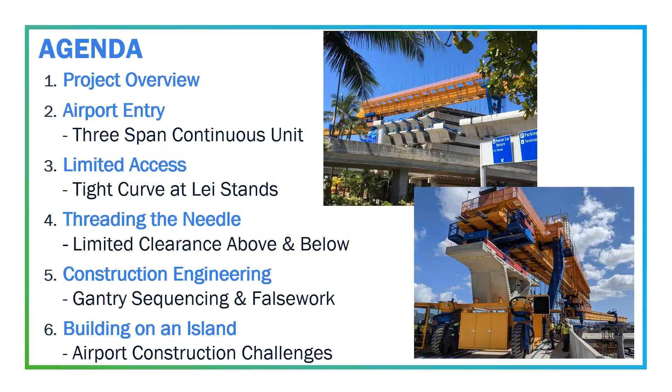The Honolulu AGS project owner is the Honolulu Authority for Rapid Transportation, or HART. They've been a wonderful client to work for, I have only positive things to say about this project and them as an owner. The airport guideway is one phase, phase 3 of the overall project, starting just a little bit before Pearl Harbor station and continuing all the way through Middle Street Station through the airport. It was awarded in 2016 for $875 million.

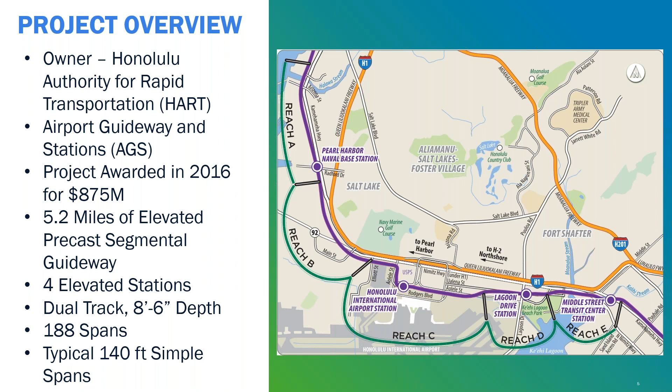It's 5.2 miles of elevated precast segmental guideway, 4 elevated stations which were supported in part by the guideway as well, dual track, 188 spans, typical 140-foot spans with an 8 foot 6 inch depth.

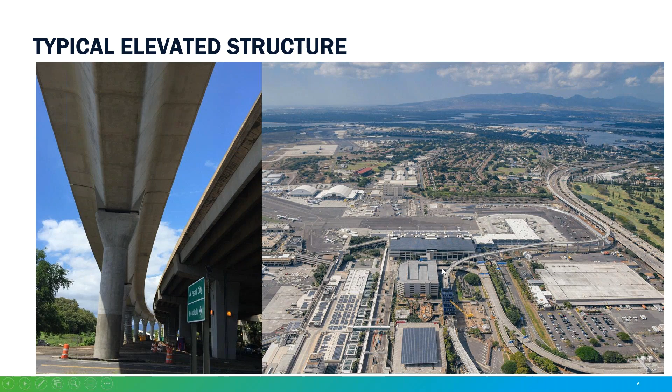This is a look at, on the left, the typical guideway spans, and on the right an overview of the project corridor. Up here on the upper right is Pearl Harbor, going around H1, turning past the tarmac for HIA, then trying to get into a tangent alignment in time for the HIA station, putting some pretty tight curves into this area. Focus of today's presentation is in the HIA area, going over the tarmac and getting past the parking garages. You see all the operations roads, elevated ramps, and this is where the future station will be located.

Well, it is currently located - we have 3 main areas that I mentioned earlier. Airport entry spans 522 to 524, this was a 3-span continuous unit. Then spans 535 to 540, another very tight radius curve with real limited access and limited footprint for piers. And my personal favorite was a limited vertical clearance and shallow box area in what we would call Reach D near the Lagoon Drive station.

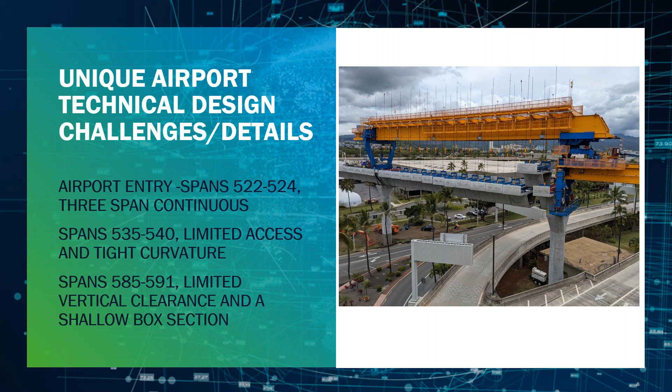Overall, with this 3-span continuous unit, our goals were to use the project-wide span-by-span erection method and the project articulated gantry, to try and minimize impacts on the way we were doing this, and also minimize impacts to the operations of the airport. This is a very active international airport, with a post office nearby that also needs to be operational nearly 24 hours a day. We also wanted to incorporate, even though we were doing an atypical span arrangement, as many of the project details as we could to minimize modifications to the forms and construction techniques.

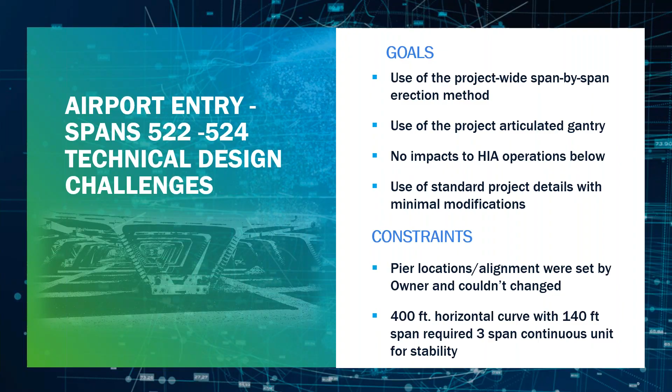The pier locations and alignment were set by the owner and couldn't be changed. In this case, we had a 140-foot span with a 400-foot curve on it. Once again, this is dual track, single box, so a pretty tight radius for an eccentric load. So we ended up throwing in a 3-span continuous unit for the stability of the spans. This area is also the highest portion of the project, so that we could get up over the airport tarmac right here.

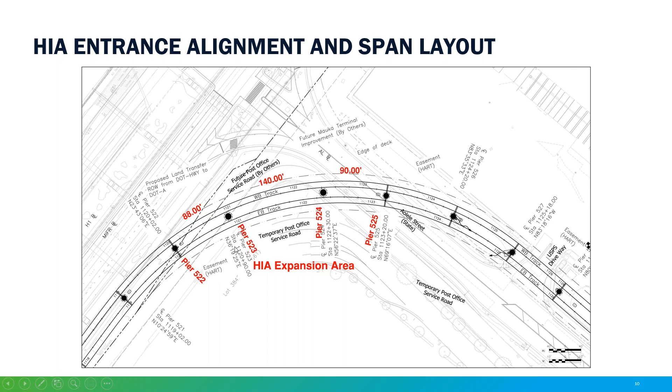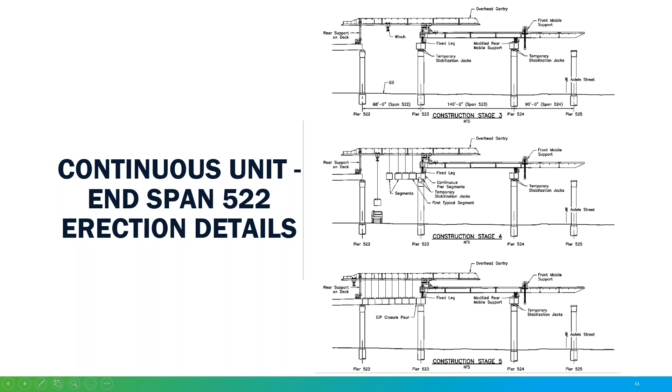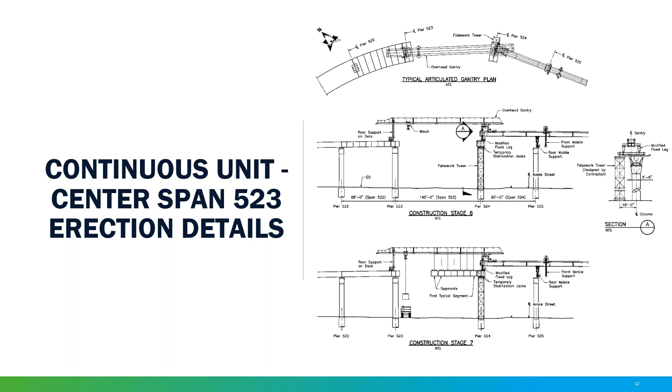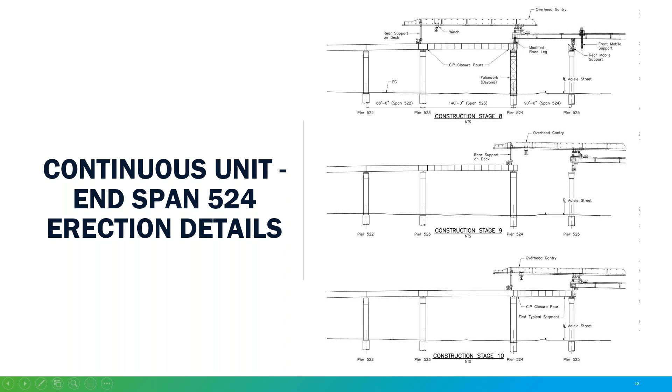The way we did that is we took simple span construction techniques, erecting the first span using span-by-span methods, and then made continuity by overlapping the post-tensioning tendons at these pier segments. Then launching the gantry - and Tony and Jeff will talk about the unique challenges of the construction engineering and gantry in this 140-foot span and tight curve, and what was needed to get this around the corner. Then the end span erection - each time we launch and erect the span, these tendons get overlapped, and we stress from the leading end, one end stressing only.

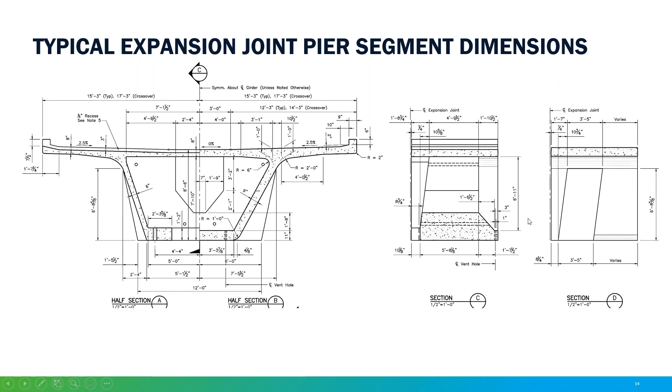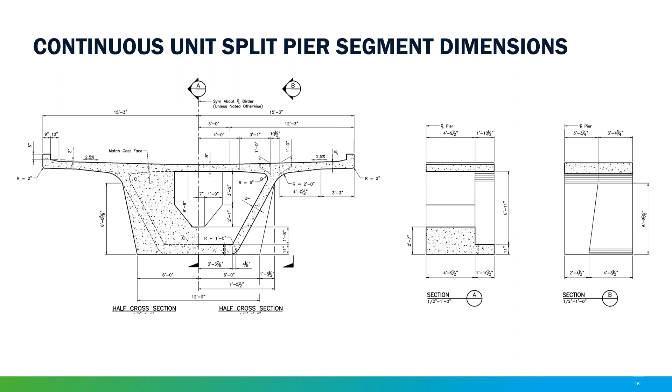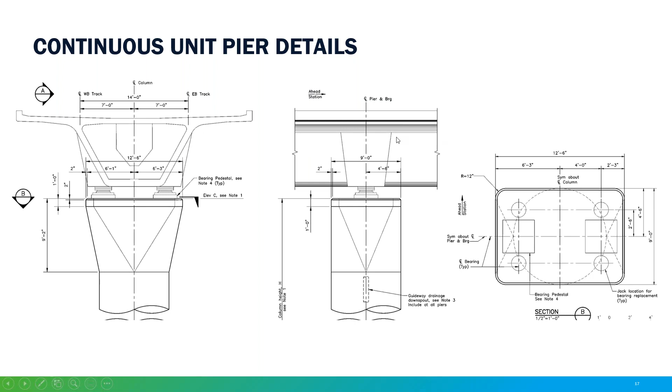This is the span side of the EJ segment. As you can see, we basically just shortened it up, truncated it through the diaphragm, and this allowed us to use a lot of the same elements from the precast yard. Really the only things that needed to be changed were some of the core forms and the bulkhead forms, and a pretty slick detail - put those back to back and match cast them, and all of a sudden you have a nice full pier segment that has anchorages on either side that can be stressed together for these pier segments.

This kind of shows how these anchorages overlap, and you can see it's quite a busy segment with the anchorages on one side with the exits, 4 tendons plus a future tendon. We needed to add some PT bars in the top to help with both ultimate moment and stresses in this now continuous high negative moment region.

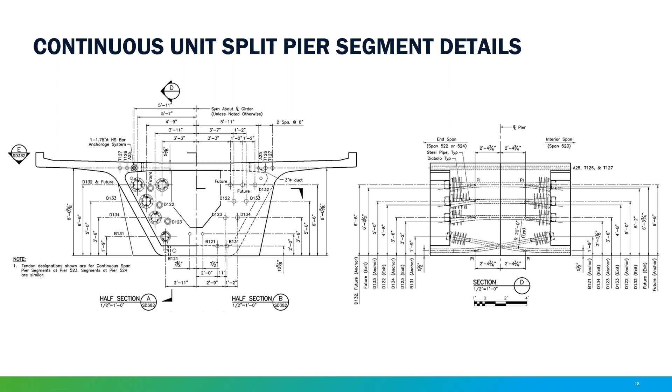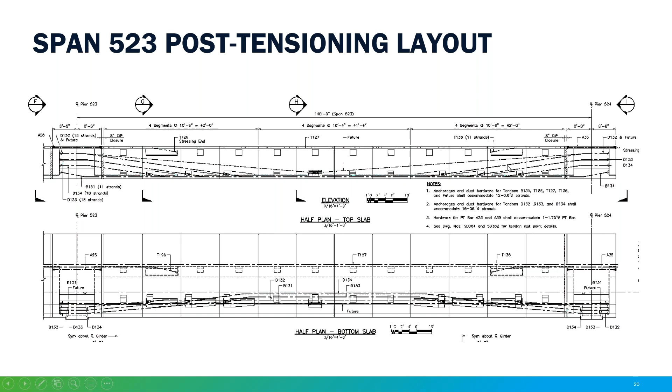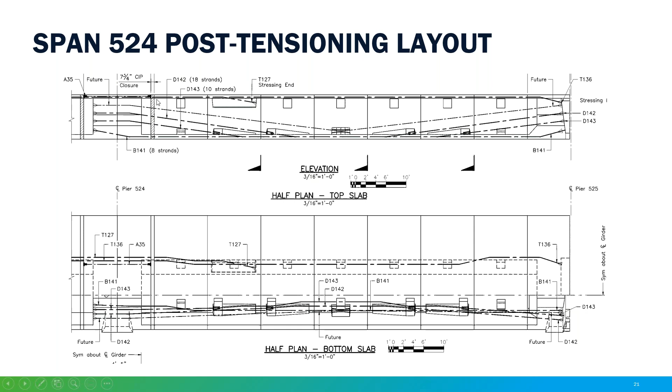So this is the overall PT layout, seeing those pier segments in use. We utilized a lot of the same typical segments within the span and tried to only use a unique segment in these pier segments. This is what that 140-foot span looked like in the center. We had to add some top PT, so we added some isolated top anchor blocks for the negative moments over the continuous piers, but otherwise utilized much of the same details as a typical span. And the end span, same as the first - we did introduce some closure pours here to help with the construction phasing and match casting.

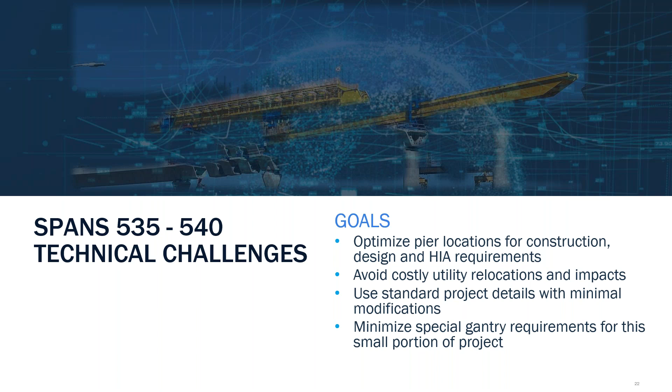Just a few spans up station, we had another tight curve area that I spoke to a little bit earlier. We wanted to optimize the pier locations and design within the HIA, the airport requirements, and avoid costly utility relocations and impacts. We aimed to use the standard project details with minimum modifications, and finally, we had a couple of gantries on the project, but we wanted to avoid any specialized equipment or reconfigurations that were needed. Tony and Jeff will dive into how we were able to accomplish that.

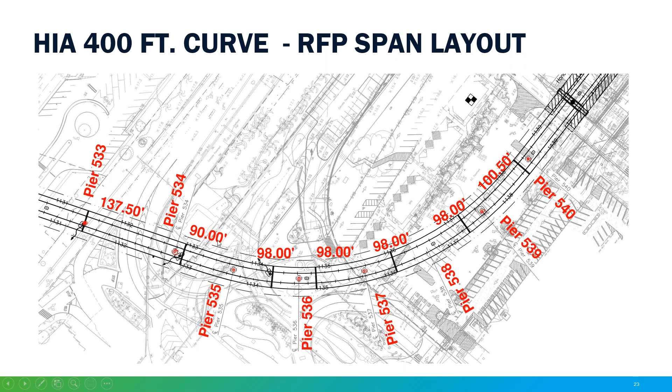The RFP span layout was pretty tight - short spans, tight radius, quite a few piers.

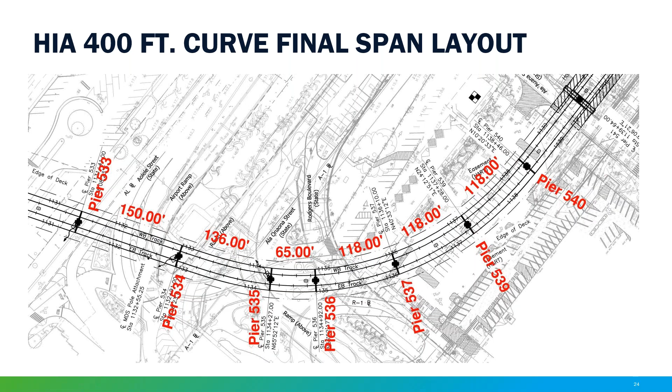We ended up reconfiguring some of these locations, keeping some short spans for stability. You can see all these access roads down below. We had really limited locations to put down towers, as well as these lei stands right here in this parking lot. The 118-foot span ended up with the only pier in the lot itself, and that was a big success to get 2 piers out. Our numbers jumped from 537 to 539, so we were able to optimize that down and eliminate a pier from the RFP plans.

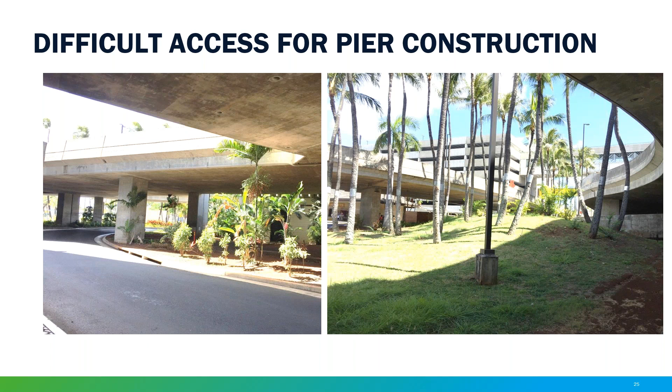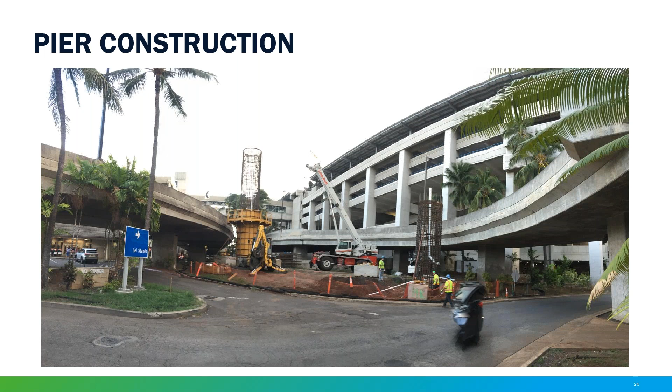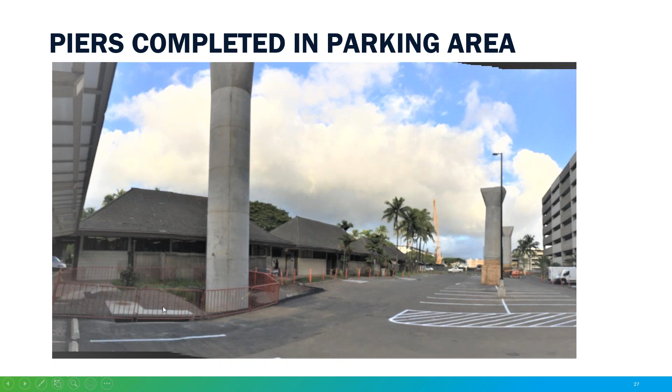This is the work area, a nice congested area confined by ramps and roads, and they ended up getting in there, putting in the piers, real tight access for major construction while maintaining all the daily operations for flights coming in and out. You can see the one pier in the parking lot itself, and we were able to avoid a utility which would have been a major relocation necessary in the parking lot down there.

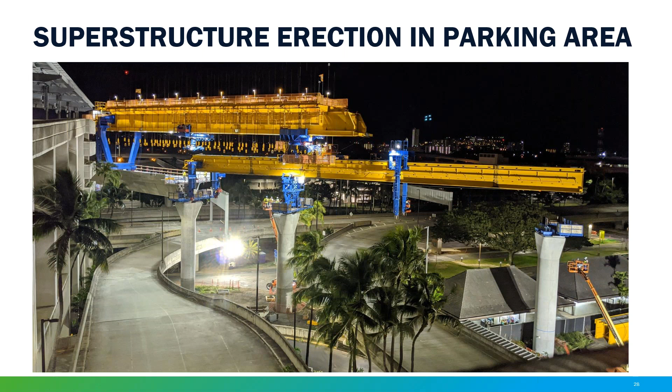Tony and Jeff will talk a good bit about the gantry operations in this area, but one benefit of putting that 65-foot short span in here is, as we were coming around this corner, we needed to make sure the nose of the launching beam and the gantry itself wouldn't clip this airport parking garage. They have some great pictures that show just how close in we got, within a couple feet, to get around that curve.

Post-tensioning of the tight radius curves utilized a lot of the same details as the typical span-by-span, with the addition of this top tendon. Even though it's a simple span, this top tendon is not used for top stresses in the classic sense—it's used for torsional shear stresses, and that's why it needed to be added in. But that was really the only special detail that got added.

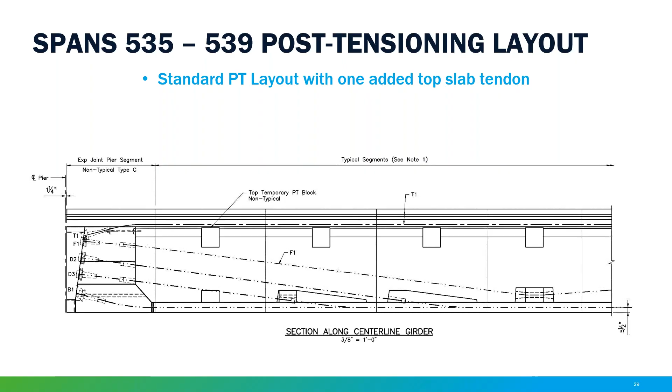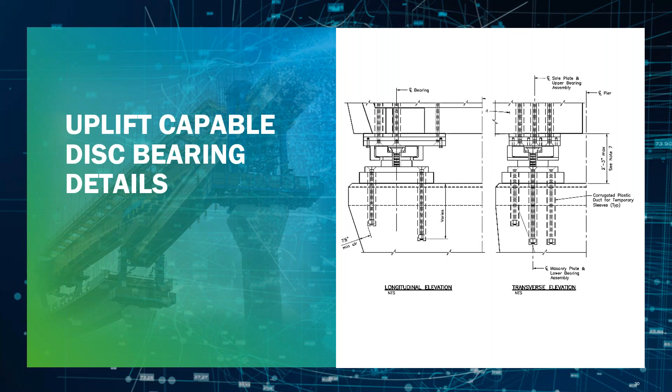But with the simple spans and the tight curves, we did end up having to utilize uplift-capable disc bearings. They were provided by R.J. Watson, and that was one of the unique features of this bridge. These do see uplift in the service condition.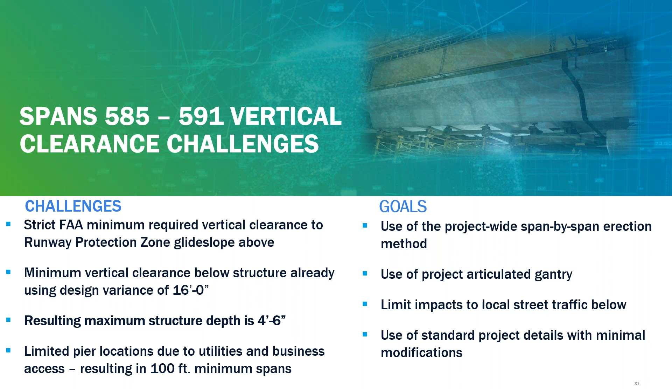The last area I want to touch on is the airport guideway or glideway area of the job. There was an FAA requirement for minimum vertical clearance in the glide slope above the runway, so we had to get planes above these spans with the train clearance, but also it was over an active roadway with trucks and a lot of industrial businesses. We ended up with a resulting maximum structure depth of about 4 feet 6 inches, and once again limited pier locations because of all the businesses and utilities in the way, while still wanting to use a lot of the typical details from the rest of the project and avoid costly modifications.

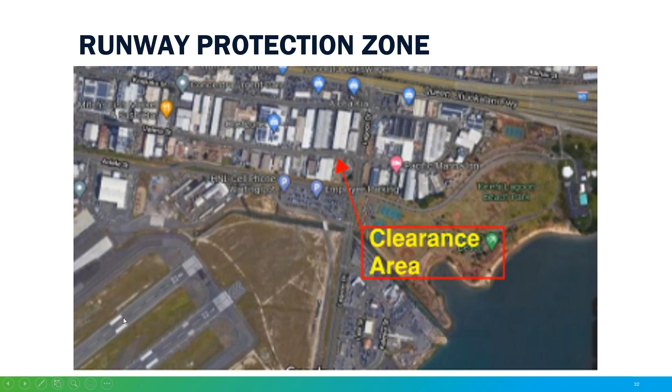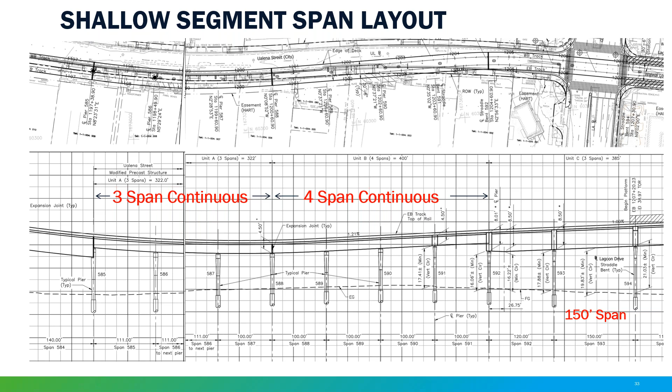This gives a sense of the project area along Ualena Street, which then goes over Lagoon Drive. You can see the glide path here, and that ended up setting our alignment down in a real low position to achieve the glide path window, while also maintaining clearances to the roadway below, and getting up in time to allow for a full depth box in this 150-foot span over Lagoon Drive. That basically resulted in literally an inch above and an inch below this precast box—we were within those constraints. So that set our maximum segment depth.

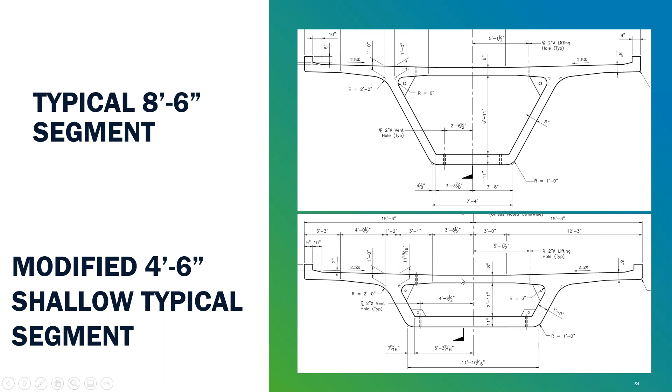In order to achieve this 4'6" box, we used a lot of the same shape, truncated the webs and widened the bottom slab. We did end up having to increase the width of the webs to 12 inches for shear stresses, principal shear stresses, and ultimate shear capacity. As a result of the wider bottom and thicker webs, these segments, even though they're half as deep, were basically just as heavy as the full depth segments. This gives a sense of just the scale of fabricating these, and how tight it is in there.

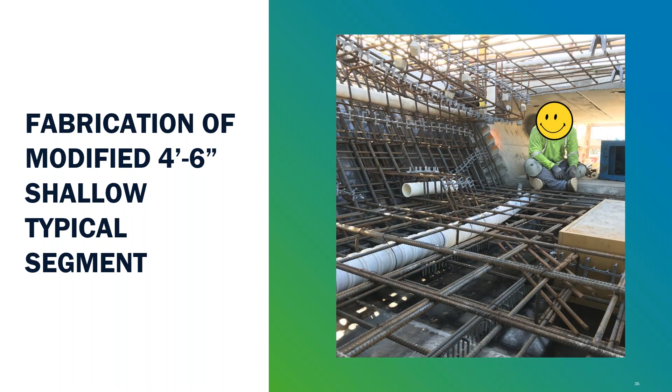A lot of the similar details. We did end up having to incorporate a lot of new details for the blocks in this area, where we would be deviating multiple tendons at the same time. The anchorages had 4 tendons plus a future tendon, so the anchorages of the continuous pier segments were very, very busy.

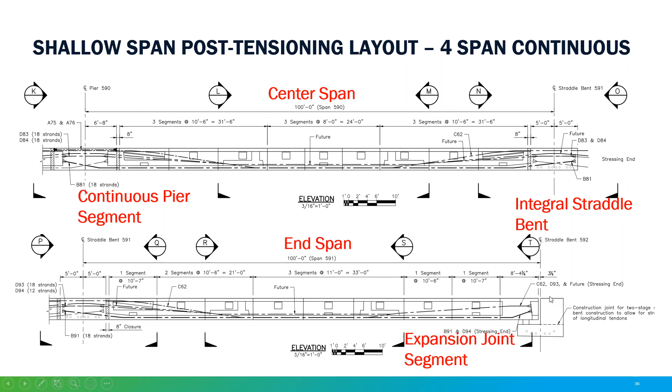And then just to make matters worse, we actually had straddle bents, integral straddle bents at 591 and an interesting shaped straddle bent at 592 to keep the clearances that we needed above the roadway. You can see all the anchorages piled into this pier segment.

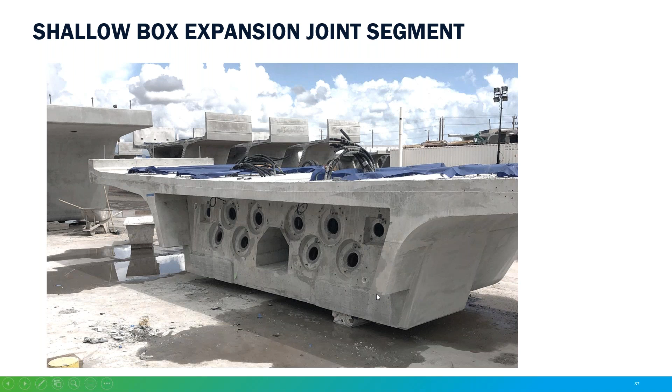In this particular location, in order to set the wedges, STG needed to block out this cheek wall here, which will ultimately be hidden behind a shear block. So you can't see this from street level, but to get access in there, they opted to block out the cheek wall. And just to give you an idea of how congested these very shallow straddle bents are, this is the PT layout for straddle 591.

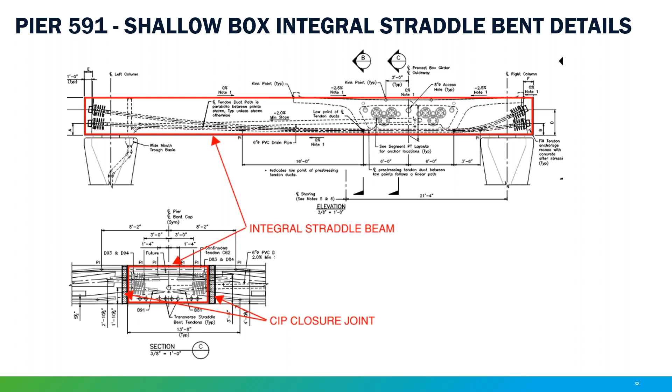A lot going on in these segments.

And then this is just a larger detail of 592. We ended up having to put a construction joint in the stem, the back wall of the straddle bent, to gain access to stress the front end.

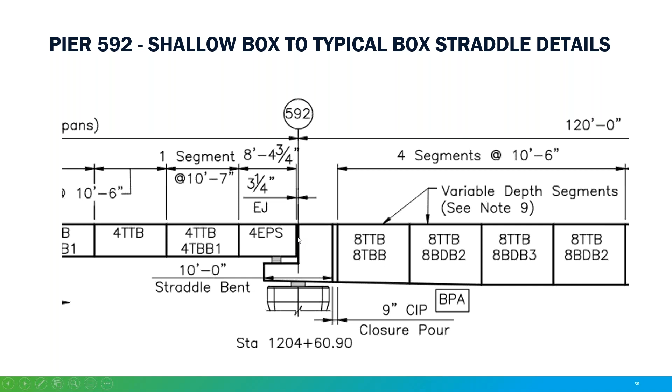This is constructed left going right. And then they cast this straddle, once this is stressed, they cast all the anchorages for the upstation span into this back wall. And then all they need access here is just the dead end anchorages to set the wedges.

And with that, I'll have Tony talk a little bit more about the particulars of construction engineering on this project.

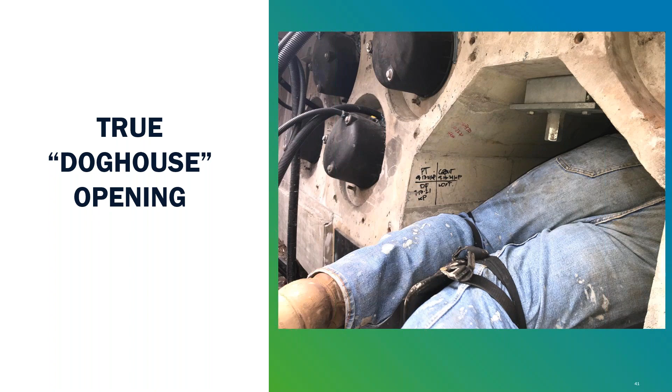Even better. So this project was really interesting for the construction engineering because we were able to be involved with pretty much every part of the project from start to finish.

Beginning with the constructability review, we helped the contractor and designer develop details that were buildable and met their preferences. Moving into equipment selection, we ended up with 1 conventional and 2 articulating gantries made by Deal, as you see on the right, but several other manufacturers were considered. And once we knew the gantry types, we were able to provide preliminary loading to help progress the early design.

Continuing into geometry control, there were over 2,700 segments over the 188 spans. We also helped STG with day-to-day construction support. And then what we're going to take a deeper dive into today is the erection manuals and falsework.

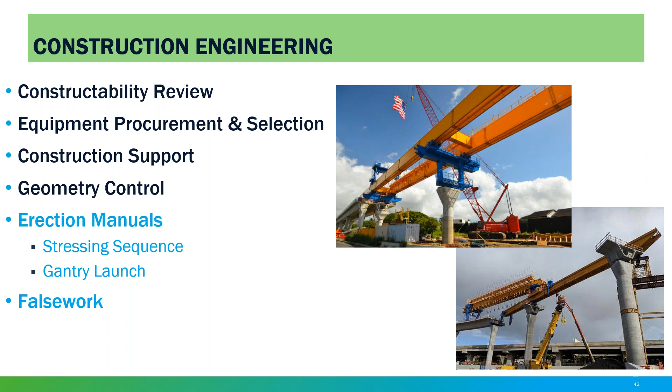So the launching gantries require a unique sequence for each span that we call an erection manual. That's because the procedures are different depending on the span length of the one being erected, the tendon layout for that span, and the length of the span that the gantries launch into.

Each span has a stressing sequence, which we'll talk about next, and a launch procedure that we'll discuss in a video.

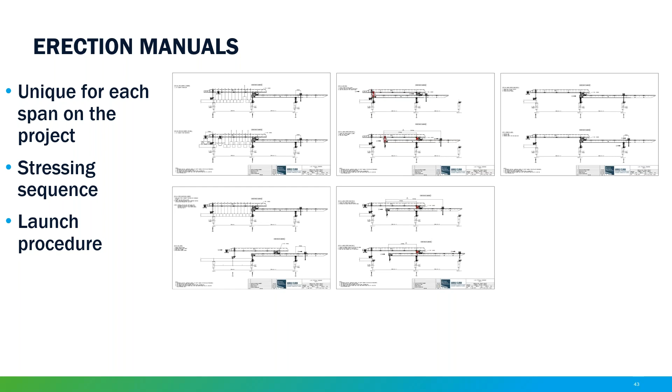So to start off the span erection, we need a stressing sequence. That sequence starts after the segments are hung from the gantry and stressed together with temporary PT bars and epoxy. Some spans require an individual analysis, but for the most part we're looking at groups of spans.

So for example, say 130 to 140 foot spans without top slab tendons: we combine the span post-tensioning layout, which is given in the drawings, the stiffness of the concrete box section, which we can calculate, and the stiffness of the gantry, which we find by modeling the main girder in RISA as shown on the bottom.

Some things to keep in mind, as I'll show in the next few slides, are the top and bottom fiber, making sure they stay below the tension and compression limits, and the capacity of the gantry hanger system.

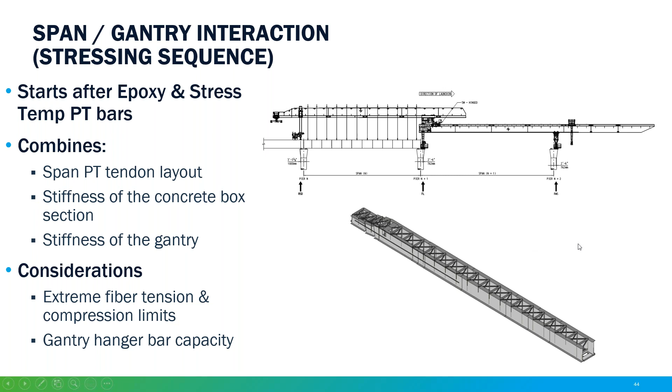So this is a typical 140 foot span. The gantry you see here is the conventional type, but articulating is the same idea. We have our gantry hanger bars, our span PT layout, our tension and compression limits.

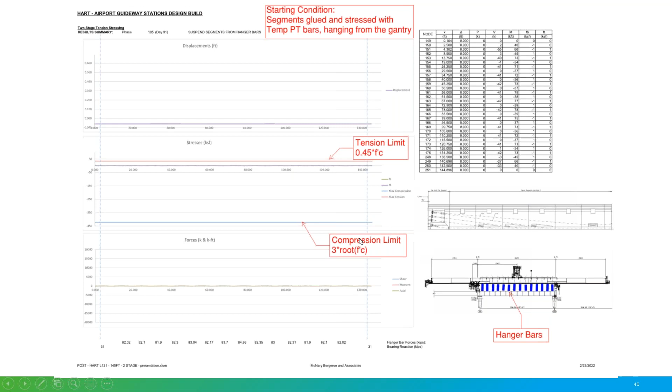So the first step is we stress our first tendon. Now as the span starts to hog up, we can see how load is being shed from the interior hanger bars out towards the exterior hanger bars and the bearings, and we start to approach our tension limit in our top fiber.

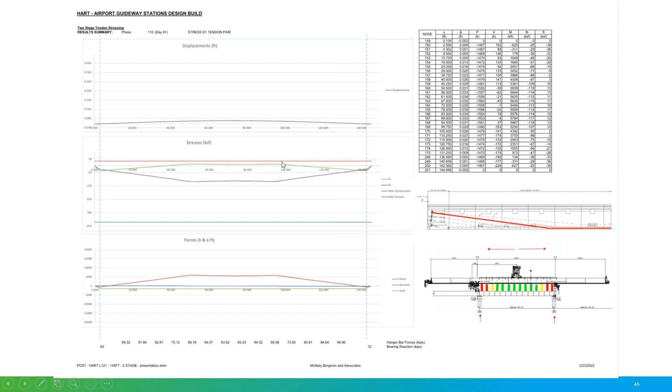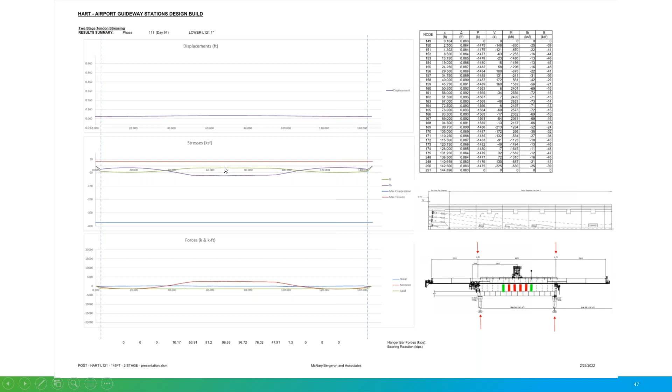So the next step would be to lower the gantry an inch. We can see that the exterior bars have been completely unloaded, and then we start to load up the center bars again. We've also relieved our top fiber stresses here.

Next, we stress the remaining tendons. The center bars' load is shed again from the center out to the exterior, and we're okay in our tension and compression limits. Sometimes the spans require us to do another set of stress tendon and then lower, but in this case it wasn't necessary.

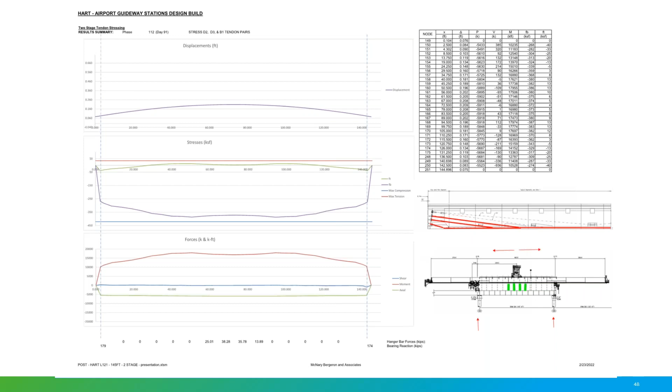And then we released the span from the gantry completely, and we're at the final design condition after span erection is complete.

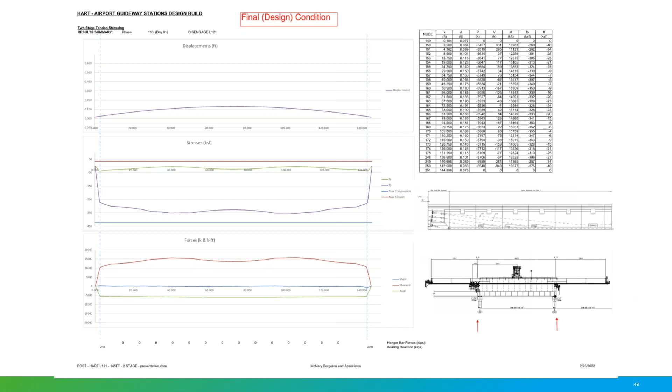After we erect and stress the span, we need to launch to the next one. Overhead gantries are usually custom designed and built for the project, which means that to economize the design, they're pretty near capacity for the typical spans, say plus or minus 10 feet. Outside of that range, we need to start considering special procedures, such as removing elements of the gantry or adding elements such as false work or counterweight.

For each launch, we need to monitor the capacity of each component, the stability of the gantry, as well as the global stability of the span. On the next slide, I'll show you a time lapse of the launch and talk through what's happening at each step. So here's an overview of each of the components before we start.

You have your main girder here in blue, your support beam here in orange. The main supports for span erection are the rear support on deck, which can drop wheels and be dragged across the span, and the fixed leg, which sits on the forward pier. Supports for launching are the rear mobile support and the front mobile support.

The supports on the piers sit on what Deal calls a pier traverse, which is erected by a crane in advance. And the component doing the most work here is the fifth wheel, which, as you'll see in the video, can launch the main girder, launch the support beam, and manipulate the support beam.

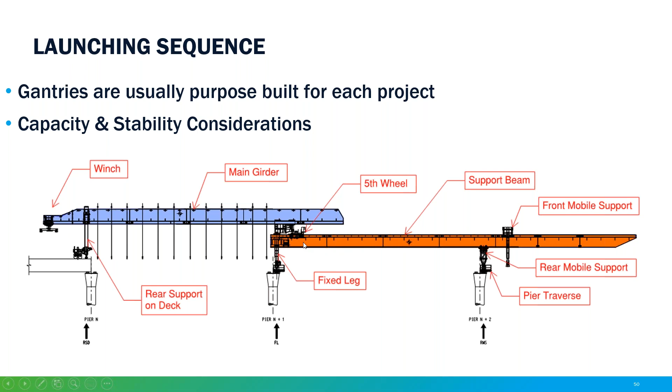This is a typical gantry launch. This is actually the first launch on the project, so there are a couple of extra operations done, especially with the support beam, to test the gantry. It will show you how it can move along the slope of the bridge and side to side around a turn.

We picked this up just after the wheels are set down on the rear mobile support and the main girder has launched a little bit along the support beam. The main girder will continue to launch until the fifth wheel is over the forward pier, or here, the rear mobile support.

After that, the winch will grab onto the back of the support beam and assist the fifth wheel for launch. The support beam launch will continue until just shy of the balance point, at which point the fifth wheel will be locked and the winch will be released.

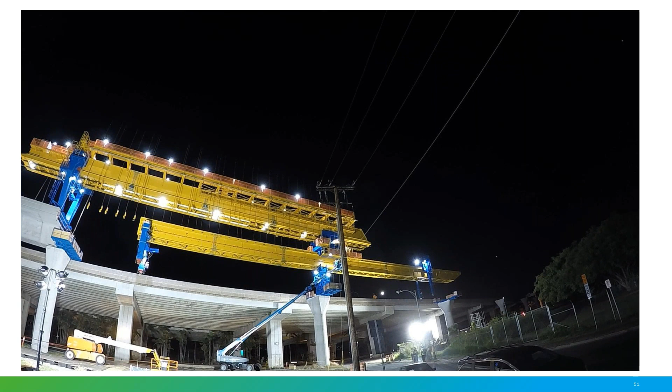Now, as part of the testing operations, you'll see how the support beam can be moved up and down to account for changes in grade on the bridge, like that, and then side to side around a curve.

Now we'll resume the more typical sequence: running the front mobile support over the forward pier, attaching it to the pier traverse that was erected by a crane previously, and launching the support beam. Just before the end of that launch, we'll see how the fixed leg can move side to side as well to get around those tight curves.

Now the fixed leg will be moved into its final position over the forward pier, attached to the pier traverse, and it'll change places with the rear mobile support, which will be moved out and trade places with the front mobile support. It's not going to show it on this video, but the last step of the launch is to simply move the front mobile support ahead a few meters, and now we're ready to erect span number 2.

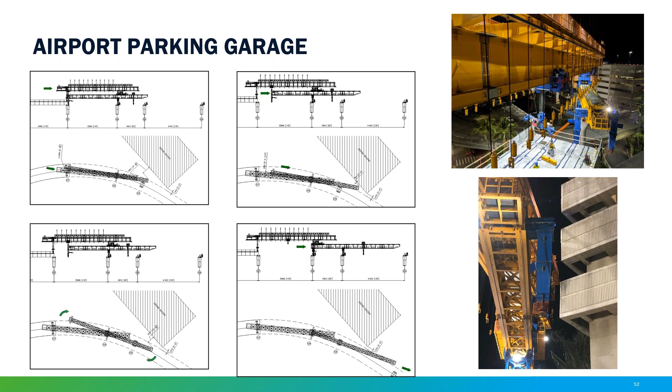Moving on to false work, there were several locations that needed false work on the job, but I wanted to highlight these three. First was the outrigger tower coming into the tight 400-foot curves in the airport. Next was the short box continuous spans that Ben talked about earlier over Ualena Street. And last was the hybrid construction near the end of the alignment at Pier 622.

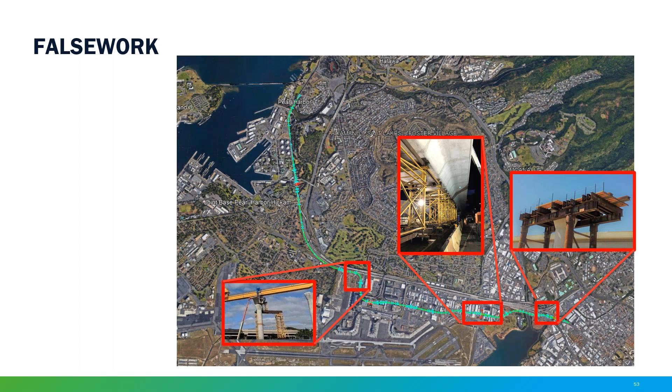So for the outrigger tower, due to span lengths along the 400-foot curve, the support beam needed what Deal called the special traverse, which was supported by the pier and an outrigger on the side.

We threw just about everything I could think of at an EFCO tower. On one side we had a utility vault we needed to span over, and on the other was a retaining wall we needed to stabilize. There was an offset straddle bent, and finally an actively monitored jack to control the deflections.

In addition to the falsework design, we needed to check the permanent pier column since we were loading it in a way that was not considered in the structure design. So we enveloped the minimum and maximum deflections in the falsework to get the axial force and moment in the column, and checked the interaction to make sure the loading was within the allowable limit.

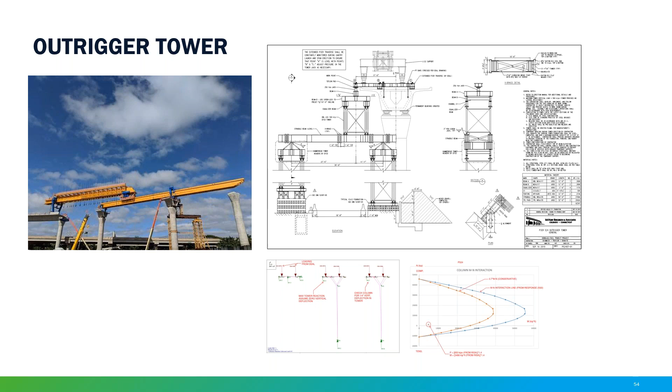Next is the continuous span falsework. This is the end of the continuous span that Ben was mentioning, and the upstation end needed to be accessible for stressing. This meant the back wall needed to be poured after the span was erected, and the whole thing needed to be supported during erection of the next span.

So the original plan was to place the front support of the gantry on towers in front of the straddle bent, but due to utilities and other buried structures, that was ruled out.

Instead, what we ended up using were EFCO towers with simple headers, and then to determine the stressing sequence, we ran an analysis similar to one you saw earlier to check the span and the straddle bents. And then after the spans were complete, the gantry was simply walked across the finished structure.

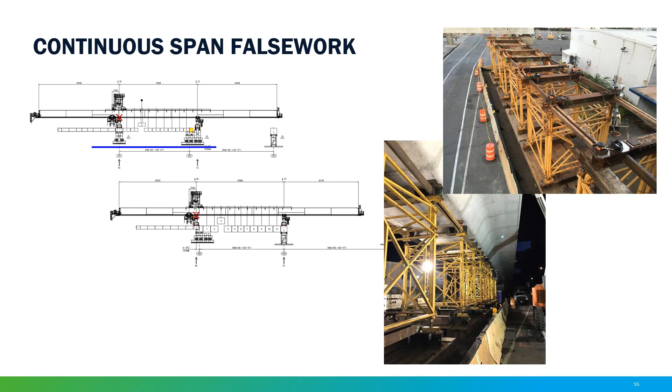Last for today is the hybrid construction at Pier 622. There wasn't much of an option here for pier locations. The road you see is the main access in and out of HIA. As you can see, you can place a pier to the left, one in the gore area in the center, and another in the median on the right.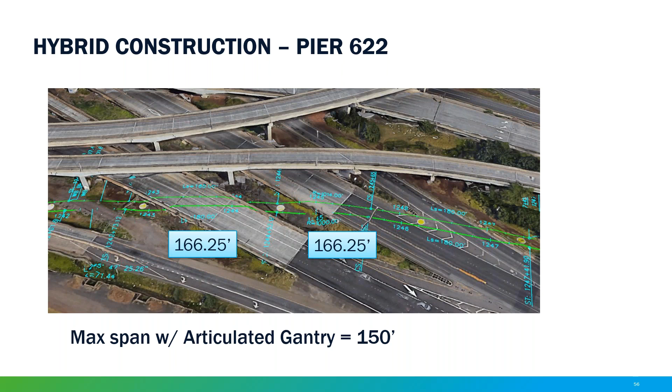The maximum span for the gantry was 150 feet, and so at 166 and change, we needed to add falsework.

So the solution here was a hybrid construction model, and we designed some falsework to support a temporary pier head on the center pier. The gantry launched to the pier head so that the fixed leg was over the downstation pile, erected the back span, launched, and erected the forward span.

It's obviously always important to keep the contractor's preferences and materials in mind, and in this case, the pier head falsework reused parts and pieces from a trestle that was used earlier on the job. Now I'll hand you off to Jeff Miron, the project manager for STG, who'll finish off our presentation today.

Jeff will discuss the challenges that go along with constructing around an airport.

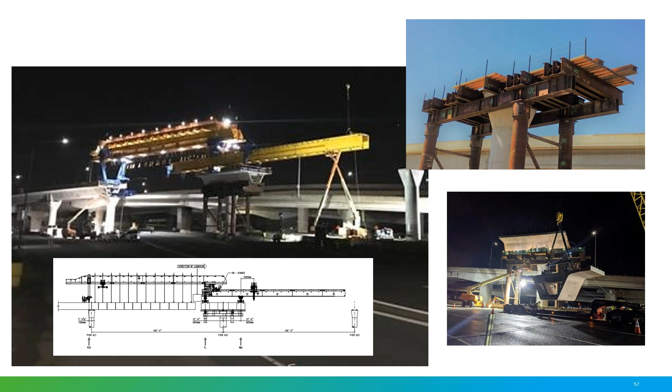All right, Jeff, you should have control. All right. Y'all see the screen? Yes, we can, and we can hear you. All right, thank you. Thanks, Greg.

Thanks, Tony. Like Ben spoke about the design of the Guideway, and Tony the construction engineering behind the efforts through this area, I'm going to speak to the construction side of it.

This section of the job contains some of the more involved, labor-intensive gantry-erected spans on the job. The selected gantry was designed specifically for these 400-foot radius turns in and out of the airport area. Without the range of capabilities made by the launching girder, other means of construction would have been more of a force fit and at minimum impacted our construction schedule and caused greater expenses.

Some of the advantages the LG provided us is that we had a limited right-of-way, typically through our urban and industrial environment throughout the project. Conventional crane footprints were extremely limited. The gantry provided the construction support needed to erect the Guideway through the narrow thoroughfare.

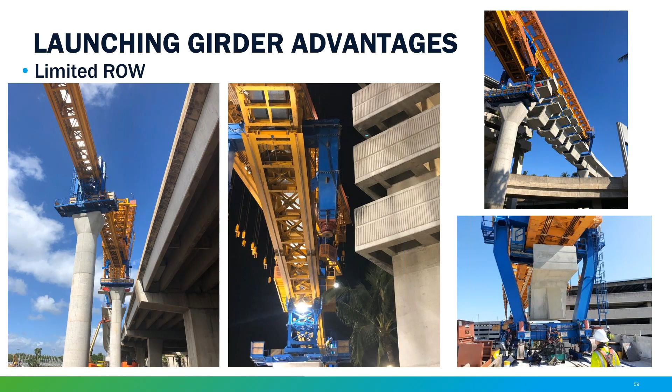In regard to the post office facility, during the beginning phases we were denied access week after week from a regional management support level at the post office. As we recognized we weren't going anywhere, we initiated a different approach to try to get more down to the ground with local management and the different controls involved in that area.

Our main intent was to display the overall sequence, have everybody understand exactly what we're doing, while we learned the rules which had to be followed when working in the area. Our construction activities couldn't legally restrict the citizens of Hawaii from receiving mail, and we needed security badging for access to the property—there were quite a few rules of engagement we had to understand.

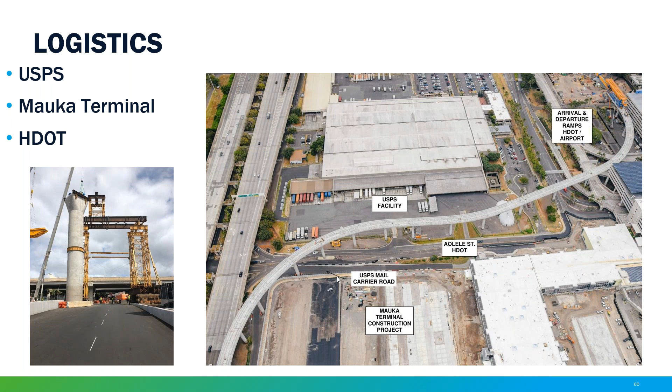When it was all said and done, we were able to coordinate this area successfully with the Mauka Terminal and the post office. Basically, the coordinating challenges in the area were overcome simply by knocking on our neighbor's door, building a relationship, and making sure everybody understands what needs to happen and works with each other.

The spans that had one closure to coordinate weren't too bad to work around the designated times. We had to do some shifting, but typically they weren't as bad. Some of the spans required 3 to 4 different traffic control plans, and we couldn't take a single traffic control plan simultaneously, as it would disrupt, for example, the post office arrival ramps, departure ramps, parking structures, and different access thoroughfares through the airport.

We had inconsistent allowable ranges of time to operate, which varied from one traffic control plan to another. For example, one TCP would be from 9 p.m. to 2 a.m. Monday through Friday. Another one could be 10 p.m. to 4 a.m. Thursday to Sunday. So the permits were ultimately extending our erection duration cycles in multiple cases through this area.

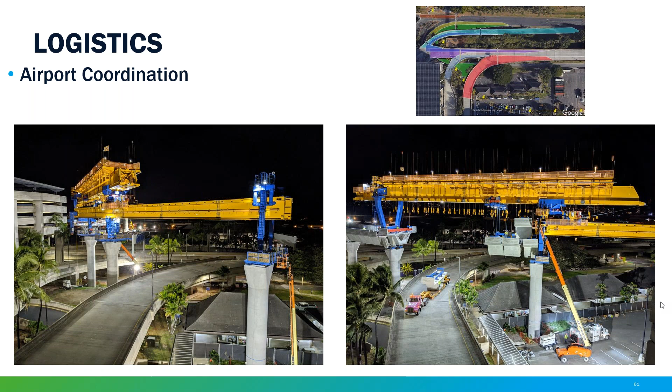As mentioned earlier, the gantry that was designed specifically for these curves used its maximum horizontal rotation to erect through the 3-span continuous.

The 20-span stretch of guideway used roughly 80 or so disc bearings, and all but two spans contained uplift-type bearings. This range of spans required the bearings to be grouted during the span erection sequence in order to resist the uplifting forces exerted on the spans during movement in the RSD while launching the gantry. Including the bearing grouting into the erection cycle added a couple shifts to the process because of forming and curing. We noticed this was a necessary evil compared to our typical 4-day cycle to support the span erection, so we did whatever we could to minimize the additional duration and resorted to procuring a high early grout.

Conservatively, this area was the most non-typical portion of the guideway which the gantry erected. To support the gantry kinematics through the varying span lengths along the curve here, we performed numerous gantry reconfigurations.

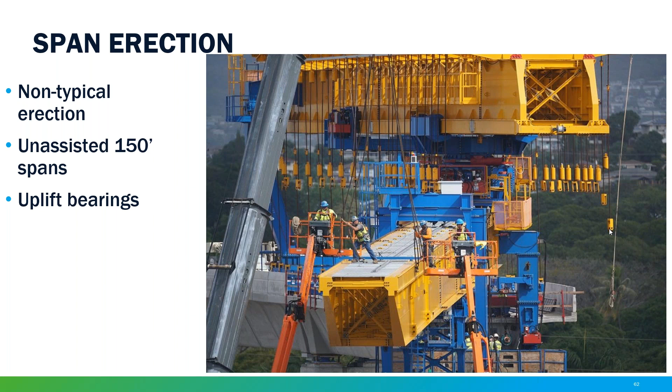Beyond the removable support beam elements, we had some other equipment required to get us through the guideway as well. We had a support beam counterweight, which would pin to the rear section of the support beam and was used to equalize the beam during our launching scenarios.

Another example is a certain instance where we used a pier segment as a counterweight, suspended from the winch of the main girder, which is the top beam that has the rear support on the deck portal, in a situation where we were in a shorter span and the main girder had to launch with a longer cantilever in front of the fifth wheel.

As mentioned, for the outrigger towers, we had a special traverse provided to us by the manufacturer that's fixed atop the pier segment here, so as you can see, there's an offset. The traverse actually extends from here over to the tower leg, instead of typically loading directly through the webs of the segment, to distribute the load and be able to make our horizontal turn around this area.

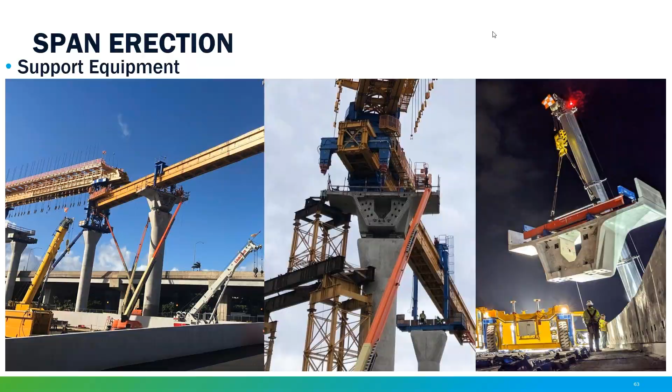In closing, I'd like to say that construction through the airport required an enhanced focus, more resources than we typically use, more effort, and breaking the ice with face-to-face intros and building relationships - padding up the confidence with these guys to do what we say we can do, and delivering on our word with constant communication was a big reason behind the success of the operation. Beyond the efforts of our joint venture and the design build team, the presence of our original equipment manufacturer supervisor, who specialized in this type of machine, and the support received from our construction engineer helped greatly to improve our efficiency and overall performance in erecting the guideway safely.